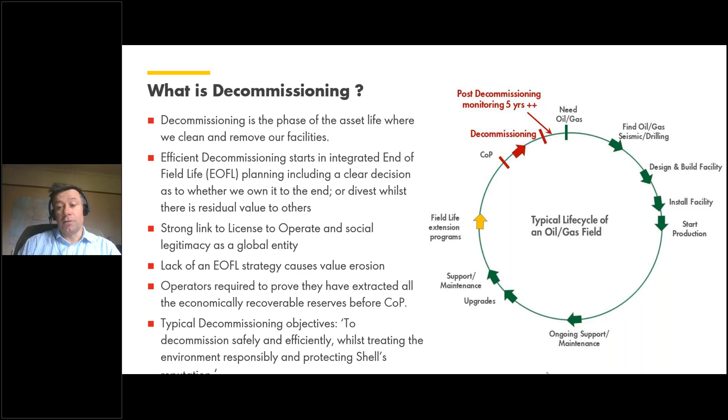So what's the size of decommissioning globally? You know, $80–90 billion will be spent globally over the next 10 years. 40% of that will be in the North Sea, and the biggest chunk of that will be in the UK sector as well.

We are blessed in this particular part of the industry with an industry group called Oil and Gas UK, who once a year take data from an annual survey provided by all of the operators. They generate a decommissioning insight report that comes out annually every November, and if you're in the industry, it is essential reading because it gives very good clarity on the type of projects going on and the size of future workload.

Interestingly, we actually decommission more wells than we drill these days in the UK sector. But the cost of that activity is still only about a tenth of our total cost of operating our oil and gas facilities in the UK. It is a growing business, about £1 billion per year, growing slightly, although with the cash constraints many companies have found this year, there's a general trend that we don't spend as much on decommissioning as had been planned 2 or 3 years ago in our plans.

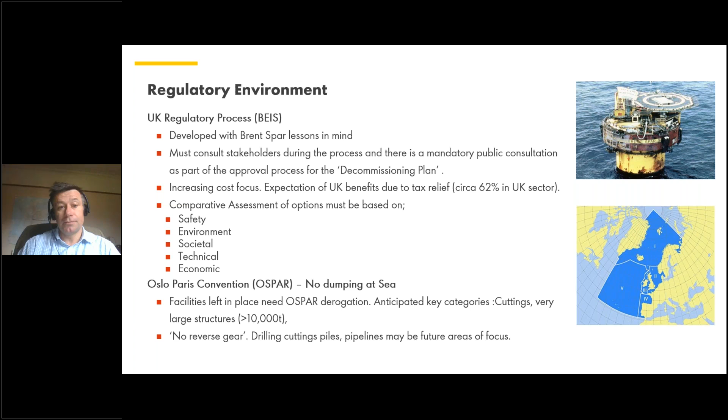So there are a number of elements of decommissioning. There are elements which you just have to do because they're determined by regulation - you have to plug and make safe the wells, plug and abandon the wells, as I just described. You must remove the topsides and structures which are above the surface, and any residual hydrocarbons and debris also have to be removed.

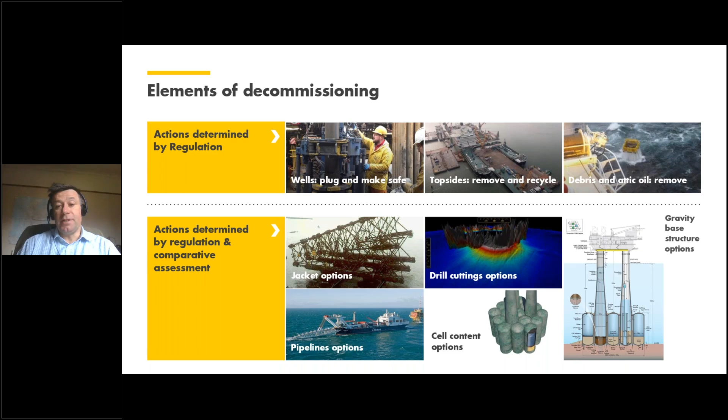Where there is some optionality, dependent on agreement with the regulator based on evidence and comparative assessments, is on large jackets, pipelines, what's at the bottom of some of the cells, and drilling cuttings as well. These are the areas where you have to do engineering and environmental assessment in order to determine the best way to decommission, either to remove it or to leave it in place.

However, if you run your asset into the ground, or cut down on maintenance, or don't do your fabric maintenance or equipment maintenance, then when you come to remove it during the decommissioning phase, you may have to reinvest again. That expenditure is ABEX, or abandonment expenditure. So you don't want to spend too much effort reducing OPEX if it impacts your ABEX.

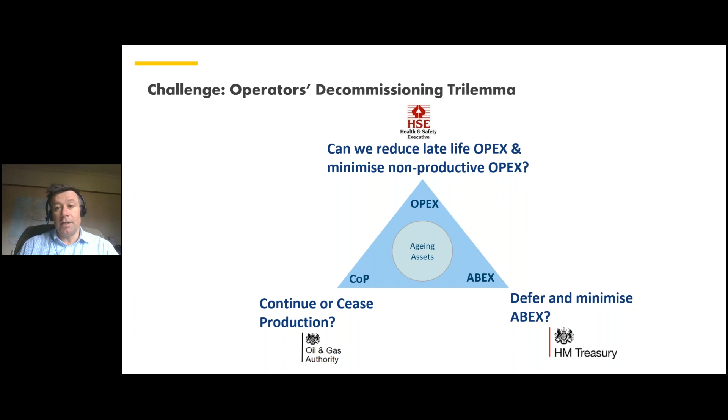What happens is that this triangle is pulled by three separate regulators who work together, but their focuses can be slightly different. The Health and Safety Executive is very focused on making sure we continue to invest in our assets to keep them safe. Treasury is very keen to make sure our abandonment expenditure is as low as possible because of the tax burden associated with it. And the Oil and Gas Authority is also interested in making sure we maximize oil and gas production in the UK sector. So that gives you a bit of background on what decommissioning is about.

I'll now go on to talk about Brent field in particular, and just to highlight that Brent has been around since the 70s. This really is the final chapter of what has been a great servant for this country.

What we try to do is create an environment where we're enhancing that legacy, concentrating on four elements. One is the safety element. The next is to ensure that particularly the last platform, which is Charlie, will be the best decommissioned project yet. We want this to be a benchmark for people development as well, which is really important in keeping our staff motivated, acknowledging that this is an evolving industry. And the last thing is about playing our part in developing lessons learned for that industry.

So where is Brent? Brent is in the north of the North Sea, equidistant between Norway and Shetland. It's a hike from Aberdeen, and for those of you in the southeast of England, Aberdeen must sound like near the North Pole. It is very northerly, with little protection from the British Isles with respect to weather, making it a pretty inhospitable place, particularly in winter. The field was found in the 70s, and it was the first major piece of infrastructure in that part of the North Sea.

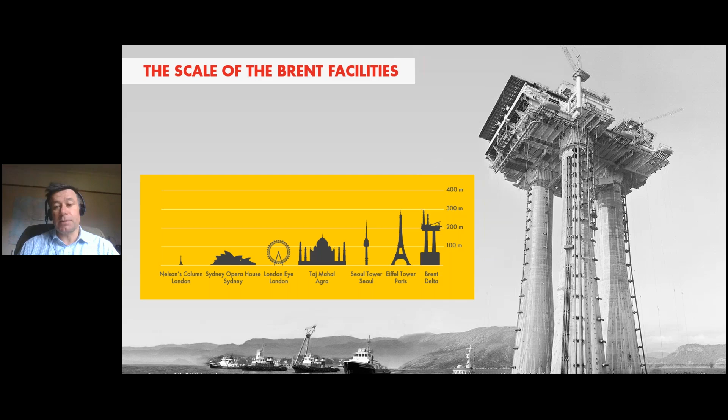They did an amazing job. If you look at the time frame from discovery to installation, 5 to 7 years is probably best in class for equivalent projects even in this day and age. But what is absolutely clear is that when they designed and built these massive structures, no one thought about how we're going to remove them. That's part of the burden of our current decommissioning project.

Brent consists of 4 major structures: Alpha, Bravo, Charlie, and Delta. They were all being designed and constructed at the same time, although they came on stream a few years apart, and they're all connected by a wealth of subsea infrastructure. Because they were designed in parallel, the designs are similar, but all slightly different. That gives some challenges, but also some opportunities.

Production first started in 1976, and production was maximum in the mid-80s. In that time, it was producing around 500,000 barrels per day - about a third of what the UK currently produces, and that's just from one field. We've redeveloped the field a number of times to really maximize the recoverable reserves.

20 years ago, they changed the whole processing of the field so that it turned predominantly from an oil producer to a gas producer. What they call blowing down the field - reducing the pressure of the field - sucks out the remainder of the hydrocarbons.

So we've got a very good recovery on the field, and as a result we have additional taxation on petroleum production. That additional taxation means Brent alone has delivered £20 billion worth in taxes for the UK government. You give it to the government, and that's shared around society. So it has been a great aid to the running of the country over the past 40 years.

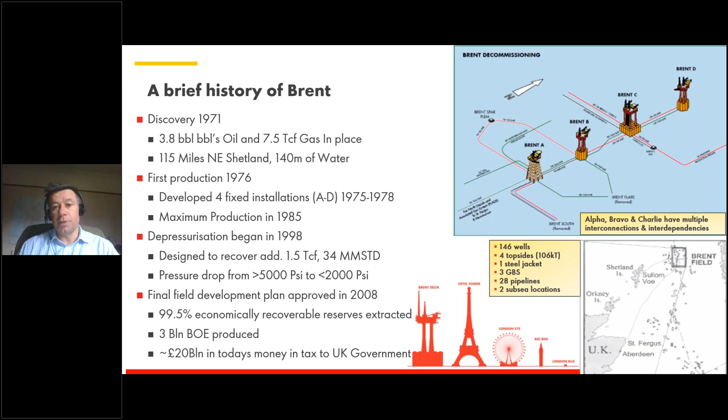But like all good things, it must come to an end, and that's our current burden on the Brent Decommissioning Project. So where are we at the moment? Well, there are 4 platforms. We started off with Delta, which was the first one which reached COP.

Then we did the well campaign, moved the topsides in 2017, and dismantling was completed last year, where we recycled and reused 97% by weight of the total topsides. I'll talk about AOR a bit later - that means attic oil recovery.

Brent Bravo is a sister platform - the platform most similar to Delta, also a 3-legged gravity-based structure. We downmanned last year, lifted the topsides the same year, and we're pretty close to finishing all of the dismantling at Hartlepool as well.

Alpha was our big campaign this year. We downmanned late last year, then removed both the upper jacket and the topsides this year in a successful campaign. The topsides went to Hartlepool in England, and the upper jacket went to Norway.

The last platform is Brent Charlie. It's the biggest platform, and it's still in production. We've started plug and abandonment there as well, making all of the wells safe, using a novel technique which we changed a bit more than a year ago. Currently we have plugged and abandoned 26 out of the 38 wells. That's where we are right now.

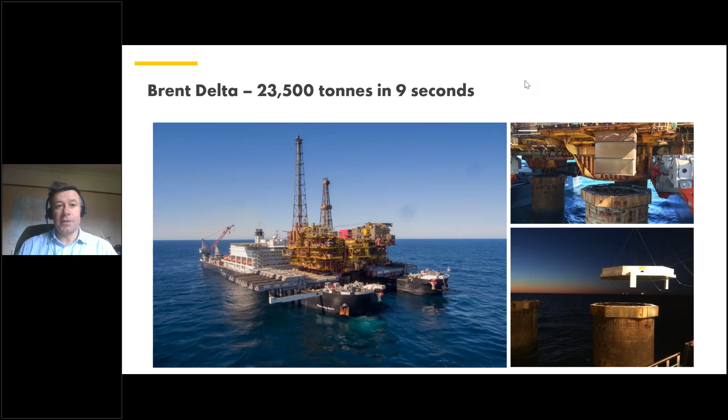So then it's sailed in the Pioneering Spirit offshore to Hartlepool, and as part of the activities, it's to move the topsides and lower it into a barge, as you can see in this picture. And because of the water depth, or because of the size of the Pioneering Spirit, this has to be done in open sea - there's no place with water depth so deep in Able. Then we move it onto a barge, and the barge is floated in and put onto a purpose-built quayside in Hartlepool in Seaton Port.

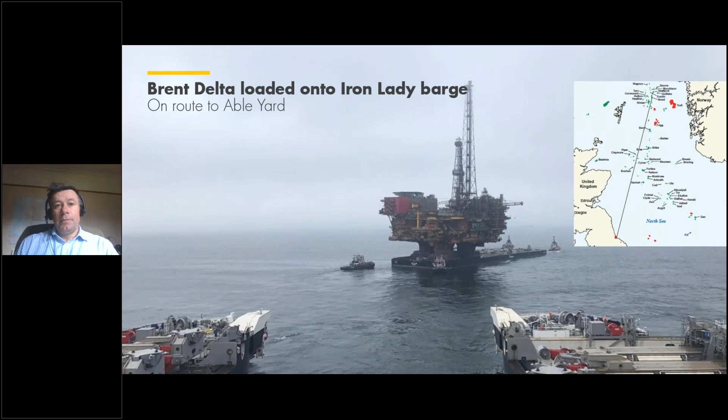So that was executed successfully in 2017. It took around 18 months to dismantle. In parallel with that, we used the lessons from Brent Delta to say, well, how can we actually improve? What we found on Delta was there was quite a lot of modifications required on the platform to strengthen the structure such that you could lift using the lift points in the Pioneering Spirit.

So we decided to relook at that and propose a number of different things. One of those was a new style of lift points. Instead of having a steel structure which was welded to the platform substructure that would be the interface between the platform and the ship, in the case of Bravo, we poured concrete from the topsides to create these cuboidic lifting points. And of course, concrete is very good in compression, so it wasn't a problem there.

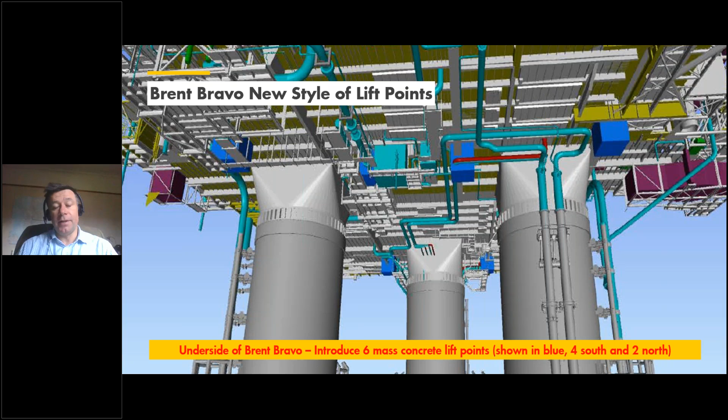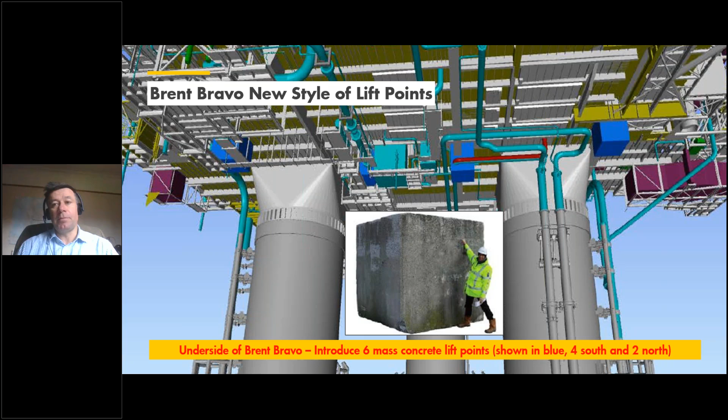And that resulted in a considerable reduction in underdeck work, and working under deck is always much more inefficient than above deck work. So we managed to install the formwork for these concrete blocks, and then pour them in through the top, and that saved a lot of work underneath. There's a direct correlation with reducing the amount of work offshore - it makes it cheaper, and more importantly, it makes it safer as well. So in decommissioning, there's a big effort to try and reduce offshore activity.

You can see around the legs a number of pipes - these are risers, caissons, and they all have to be pre-cut prior, and everything that's inside the legs has to be pre-cut as well. That's part of the preparation activities we do prior to removing the topsides.

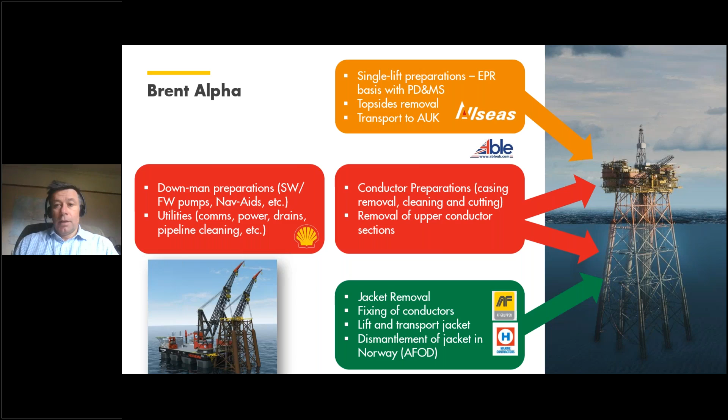So the legs were cut 6 meters above the surface. Then the whole platform was down-manned in October, and we had cut two of the legs, two middle legs - there are 6 legs on Alpha. Then we came back in May of this year with a vessel, and from the vessel we cut the legs above the surface using again rope access technicians, but this time the platform was not manned. We needed to do that because with the legs cut, the platform is not stable enough to withstand the big waves during the winter.

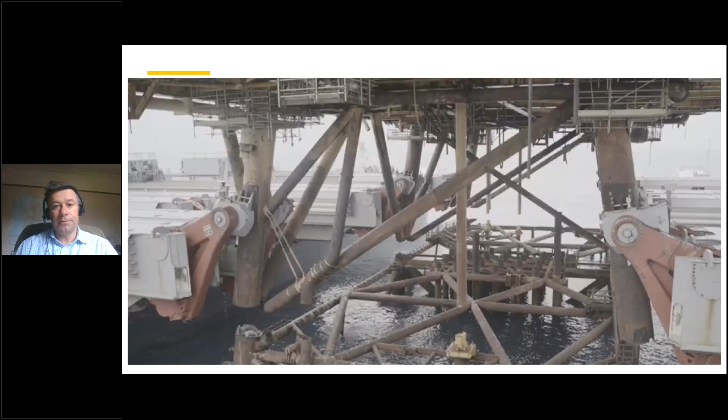We've been using very large vessels to help us move things off the offshore platforms, but at the end of the day it all ends up onshore. Top left, last year we removed the drilling derrick, which was not operating very well. We moved that and took it onshore in the bottom left, and here it's relatively quick to demolish. This is Brent Bravo in the middle, a nighttime lift. This was it just after it was being lifted, and then it goes onshore, and then the same with the jacket. The jacket being lifted out of the water with the Heerema vessel, and then loaded into the yard in one of the fjords in Norway as well.

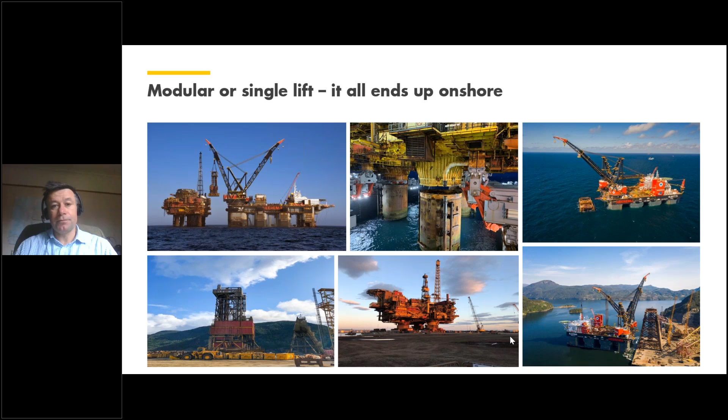Dismantling is a special art as well, and it's counterintuitive to a lot of construction. The principle is that you try and limit working at height. So you send in a minimal number of highly trained crews to weaken the structure, and then you try and bring the structure to the ground. Once it's on the ground, you attack it with machines. That's the principle of dismantling. It's a bit counterintuitive.

So that was about 1,200 tons dropped to the ground. The quayside is concrete, very thick, strengthened concrete quayside. And when there are any spillages, you just mop it up from an impermeable layer, because minimizing spillage to the environment, of course, is absolutely key.

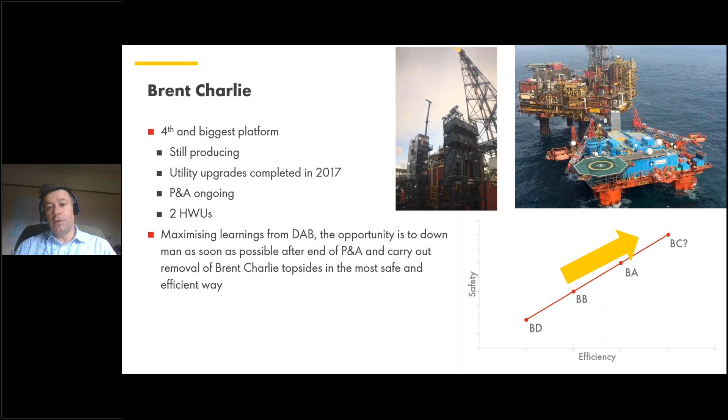And then the other thing is that we have the luxury of learning. So the trend is that every platform we do, from Delta through to Charlie, will be done safer and it will be done more efficiently.

Another key element of the project is moving from the hardware to the residual hydrocarbons which remain in the gravity-based structures. That's 3 of the platforms. There are a number of concrete cells that act as storage and separation units as well. The process is slightly different between the platforms, but the principle is the same. You pump everything out and there's always a little bit left on the top.

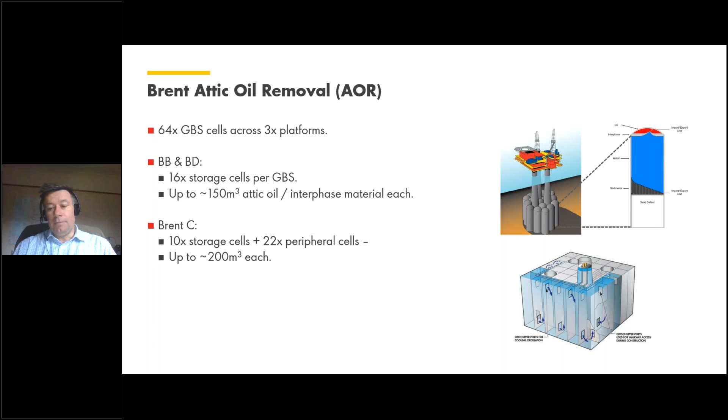We have embarked on a program of developing technology in order to drill into the top of these cells and essentially suck out the very last remaining elements of hydrocarbons in each of the cells, so that what's remaining in the cells is essentially seawater.

We have had a number of years developing that technology, and in 2014, 2015, 2016, and again in 2018, that was all done off of the platforms to prove the technology.

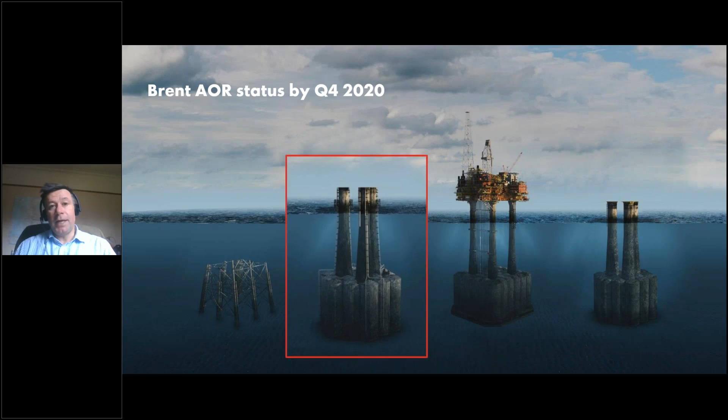This year we embarked on a focused vessel campaign in Bravo, and we managed to successfully turn a new technology that was proven into an efficient execution campaign. So we did manage to achieve that, to remove all of the trapped hydrocarbons.

And how we do that is we transfer all of the residual hydrocarbons into one receiver cell for each of the 3 gravity-based structures, and then towards the end we'll bring in a tanker, and then we'll suck it out of the 3 receiver cells into a tanker and take it to shore.

So this has provided an enormous technical challenge for us. These storage cells are 60 meters high, so they're 60 meters off the seabed and 80 meters down from the sea surface, and drilling into 1.5 meter reinforced concrete to ensure that nothing from the marine environment goes inside and nothing from the inside is leached into the marine environment was a big challenge, but we managed to do that on Brent Bravo this year.

As you can see here, there's a very, very small amount left on the top, but even a small amount at scale, times lots of storage units, means there's a certain volume of hydrocarbons we're obliged to safely remove.

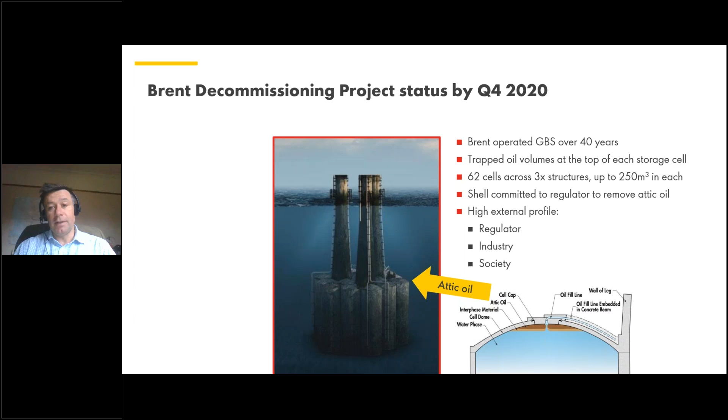So that's what's inside the gravity-based structure, that's what's on top, but we have an enormous amount of infrastructure below. This is just a simplified diagram, and as I showed at the beginning of the presentation, a lot of infrastructure has been built in and around the Brent field over the last few decades.

So we've had to install, a few years ago, some new pipework and new pipelines to ensure that production from other fields is not impacted, when historically it went up and over or past the Brent field. The whole bypass project was about disconnecting and reconnecting infrastructure so that production could continue even when Brent was not there anymore.

And we are then obligated to ensure that everything that can be removed subsea is also removed as well, and that campaign will start in the next couple of years.

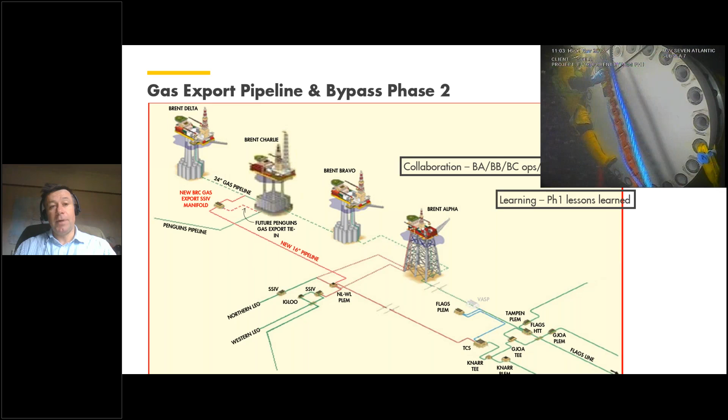So what are the key lessons for us? 40 to 50% of any decommissioning project is the wells. Understanding the reservoir, the condition of the wells, and ensuring that the reservoir is isolated from the environment is really important. Acknowledging that record keeping from when those wells were drilled, and that the integrity of those wells over time may have changed, along with the number of barriers - these are all things that need to be ironed out and decided early on.

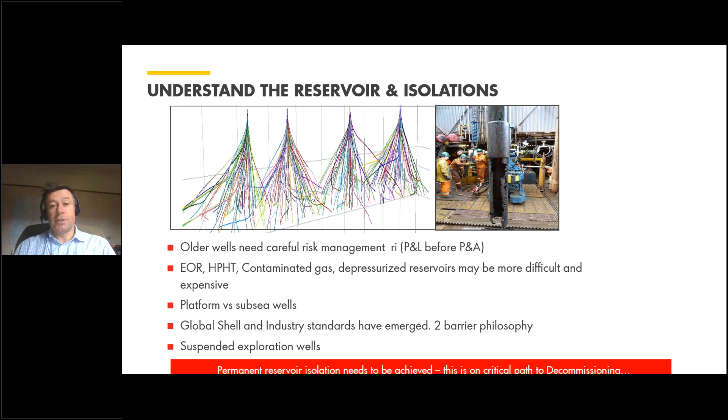You can see that not all wells are vertical. The diagram on top shows how the wells actually look in Brent. From Alpha, Bravo, Charlie, Delta, you see that all of these wells go to different parts of the reservoir. It's very, very complicated, with wells on top of other wells as well. So making sure your plug and abandonment campaign is efficient and well costed is a big part of decommissioning.

The other element is end of field life. That's all about planning prior to COP, or before you stop production. And that means plug and lubricate before P&A.

So what that means is you actually go inside the wells to make sure you know the condition of the wells, using a small piece of equipment called a mast. You do that before the plug and abandonment campaign, when the big rig is there - the big rig is more expensive and you want it to work efficiently, without surprises.

And then a big chunk of decommissioning is actually the operating cost - the cost of what's sometimes called cold stacking, the operating cost of running the asset even when you're not producing anything, and that can be significant. Many people think that as soon as you turn off production, your maintenance cost goes down. Well, it doesn't really - it goes down certainly 20-25%, but it certainly doesn't halve.

The reason for that is, particularly if you're still running on gas-fired power generation, you still have all of your safety systems, you still have all the people who need to be housed and fed, and you still have all your logistics costs as well. So the real step down in maintenance is when you remove all your hydrocarbons - then you can switch off a lot of your safety equipment that was primarily used for hydrocarbon risk mitigation. Then you run on diesel, and diesel is a lot safer than high pressure gas as well.

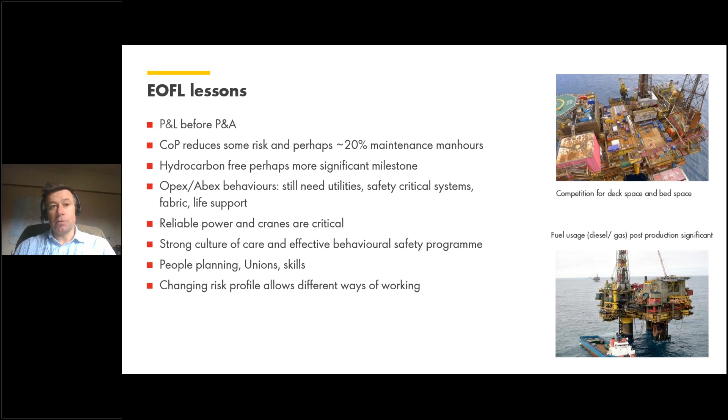Another aspect I mentioned earlier, dismantling is different from construction, and we've certainly learned in Shell UK that we are not the direct experts in dismantling, and we rely a lot on the supply chain to do the dismantling of these very large structures. That mindset is changing. It's an evolving industry in itself as more and more oil and gas facilities come from offshore to onshore.

Whereas quite often in construction we're trying to do things as fast as possible because we want to get to a goal to produce revenue, dismantling is quite different. We can offer quite large windows of opportunity. There's a lot of mandatory obligations and regulations which have to be considered as well. And then there's a great opportunity of a circular economy, of which we probably have some way to go, and it's a way of how much we can reuse parts of these old platforms as well.

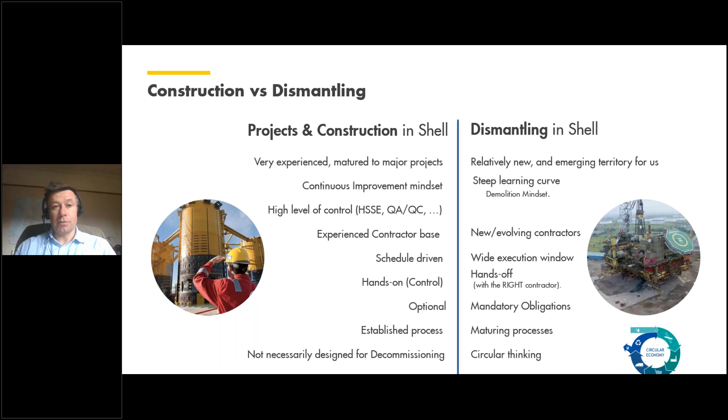One of the last things I want to cover is collaborative thinking. Decommissioning is a great opportunity for working in a more collaborative way. At the highest level, operators are not in competition. It's in everyone's interest to decommission these old facilities at lowest cost, be it Treasury or the operators as well. So we can have collaboration at the operator level, but also with the supply chain. It's an evolving industry where technology has moved and the ways of working have moved as we greater understand the challenges associated with removing these large structures.

Brent has shown that if you have a number of these platforms, one after another, you can make some sizable improvements as you go ahead, and that can be done at scale as well. So don't just do decommissioning per asset, but look at bringing them together under our portfolio, and then over time, you'll be able to decommission more efficiently.

We used a project collaboration toolkit from ECITB on our Brent Bravo project, and that offered some great reductions for creating creativity in reducing essentially offshore work by reducing the technical scope. Then when we were offshore, we made sure that people were set up so that they could work very productively. On a like-for-like basis, that created not just 1 or 2%, but a 70% reduction from Delta to Bravo. We didn't get so much of an increase on Alpha, but again, an increase in efficiency or a decrease of effort.

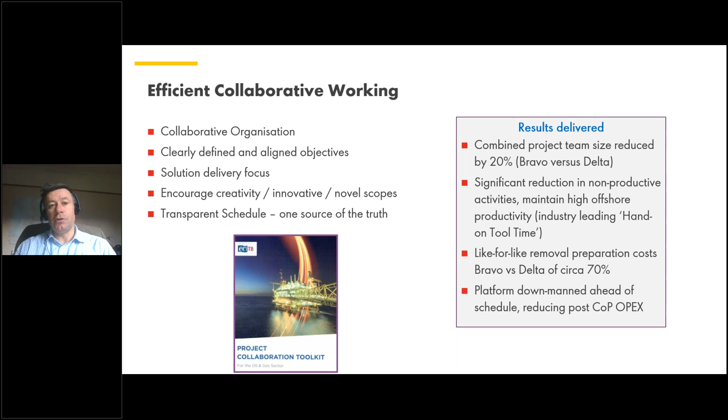So just to finish, Brent is one of many fields. We've learned a lot on Brent, but it's almost the tip of the iceberg with respect to what's remaining in the North Sea and globally. So it has a big potential for being a source of export of these skills around the world. And that's all I have. So back to you, Rob.

Excellent, thank you, William. Great presentation and great insight. I must admit, it's not something I know a great deal about, so it's great to learn about the process and the size and the weight of some of those items. Really was impressive. So I've had some questions, if you don't mind.

Yep. So the first one's coming from Catherine, who said, stakeholder management is clearly a key requirement for this scope. Do you have any tips for effective stakeholder management?

So stakeholder management is one thing. It's very, very difficult to do perfectly, but it's really easy to do really badly. And the trick is, and decommissioning is a good example of how to do it well, is you've got time to consult with everyone. So decommissioning shouldn't come as a surprise. It's something that can be well planned.

Stakeholder management is all about getting out there and establishing who they are, and taking time to listen to what the concerns are. The other thing is being open — open with what you know, but also open with what you don't know as well. And don't speak to people or organizations once, speak to them on a regular basis. Over time it will become clear who's more interested in what you're doing and who's less so.